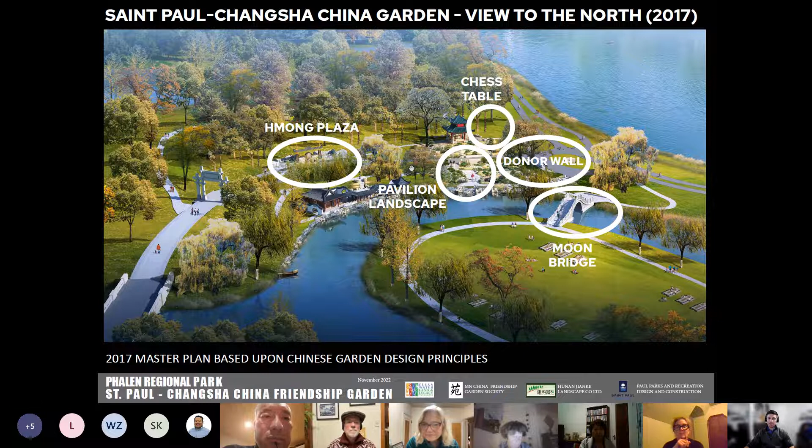And so if you remember, we have 2 different funding sources. One is an Arts and Cultural Heritage Fund. This is a legacy fund that has a deadline June 2023, so it's approaching fast. We also have another fund, which is state bonding, and this is directly used for construction only. And that end date is yet to be determined, but it is generally within 2 years from today's date.

And so our timeline, we started our last meeting in June and November, where we've been working with the community, going through designs, and it actually went back further into January of this year, at the kickoff of the site. So now we're moving into the construction document bidding phase once we go through this community engagement that's happening in November and December. Ultimately, we want to have construction documents completed so we can bid out the project and begin construction this spring when the legacy fund ends in June of 2023.

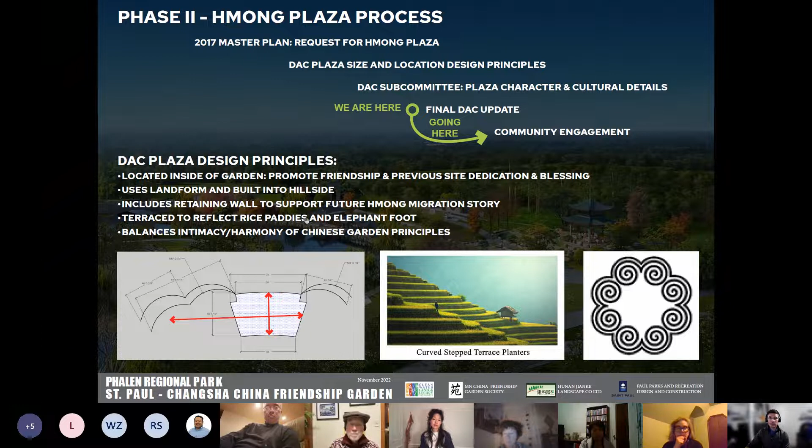The most important thing I want to point out is the features selected for this plaza. There's been a lot of thought and back and forth about what are the most significant Hmong features that will allow residents of all ages to walk on this plaza and understand that it is Hmong in itself. These features were discussed extensively, and the main elements chosen are two things: the instrument and the necklace.

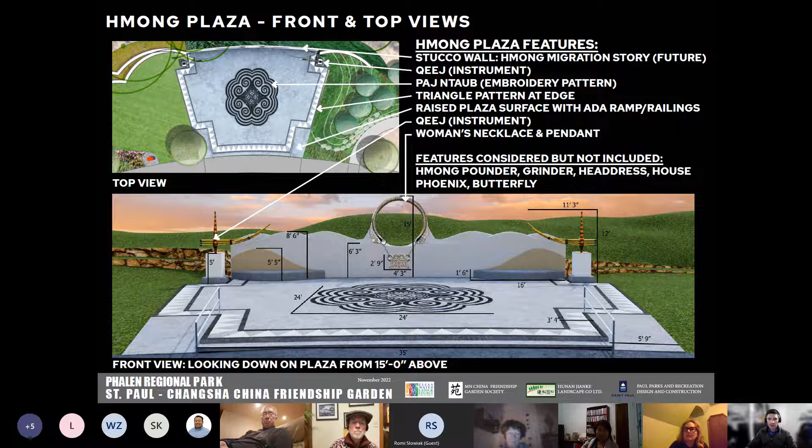The significant cultural items we're looking at are the instrument and necklace. The idea for these elements, which will be developed by the artist and artist fabricator, is that they would be made out of stainless steel. I'm showing everyone these designs, but we have an inspiration of what this necklace looks like—Donna was helpful to show us what a necklace and pendant looks like. This is the inspirational image for the necklace that you see on the wall.

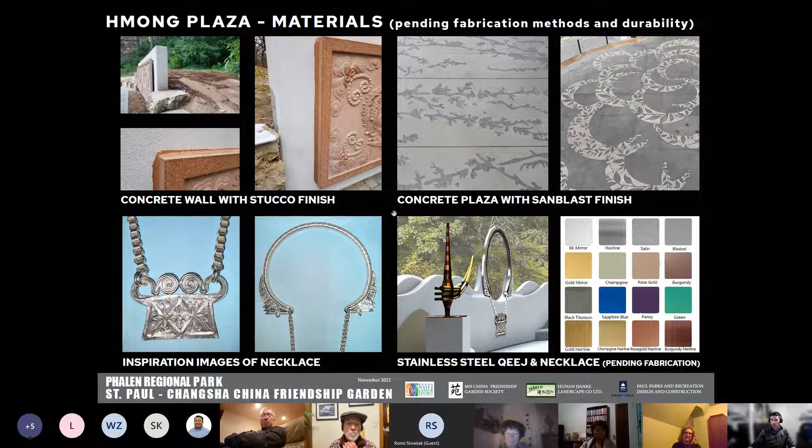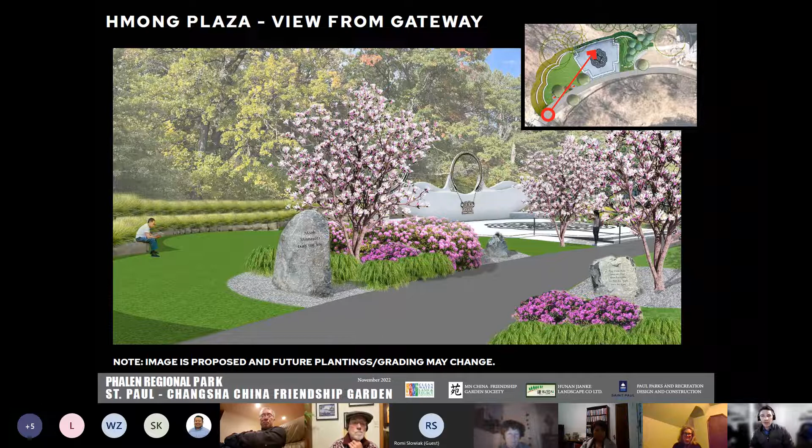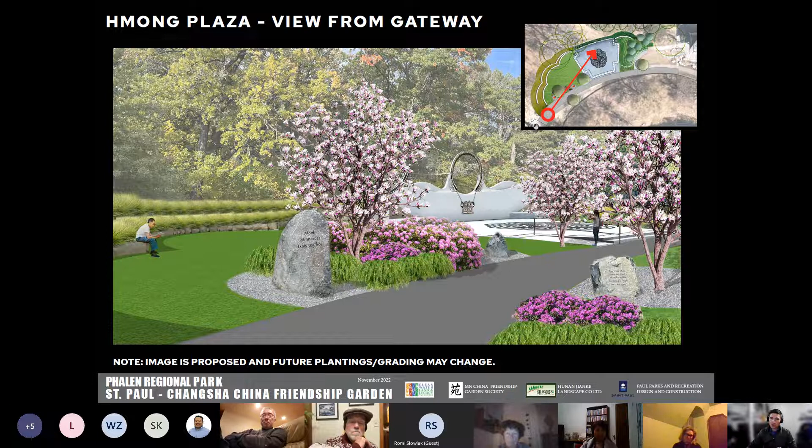All right, here are some fun images that help you understand the plan views we're looking at. I'll first show you this little inset—this is the point of the viewport of where we're looking, and this is the gateway. So the user has currently walked through the gateway and is standing to look at the Hmong Plaza. The pavilion's over here, and we are looking northeast towards the proposed Hmong Plaza.

Upon entry through the gateway, the user is going to be pointed at this set of plant material, but also framed by the 3 art stones placed in this location. I mentioned they are currently in a temporary spot, and the idea is that we will remove the stones to get construction equipment and activities through, then place them close to the same location and in the same order.

One other thing to point out is the terraced retaining walls. Here is an image of the terraced walls, which would be made out of the natural boulders that are on site, with grass planted on top to be reflective of rice paddies.

The lower wall itself would be a seat wall level, about 18 inches off the ground, similar to a bench or chair, allowing users a more informal seating area if there are no chairs or events happening, where anyone could sit along this wall. People could walk on it, but the idea is users would not walk up on top of the terraces or behind the wall. Ultimately, we would plant these with resilient materials such as junipers to suggest users not walk back there.

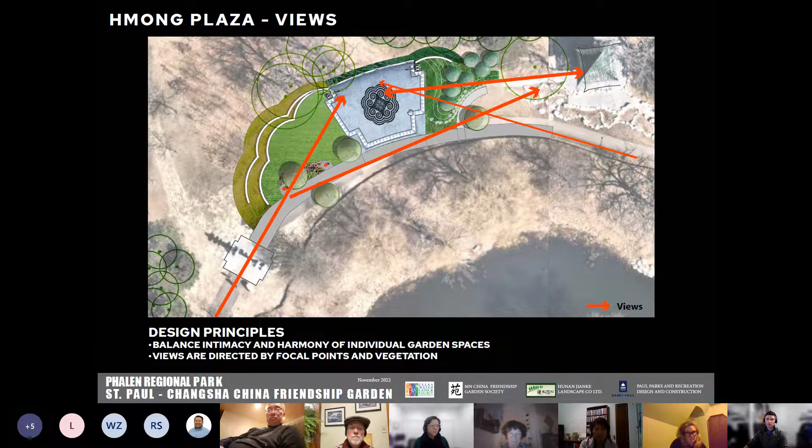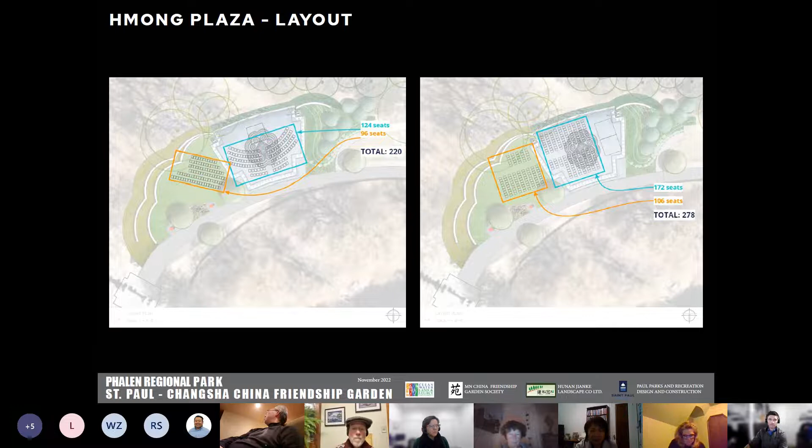Donna, you have a question? Yes, can you bring the qeej back? Do you want this image or do you want the other material? Okay, no, this one is fine.

Below the qeej there's two parts. One part says 5 feet, but there's another at the bottom. How high is that one? I think this whole thing is 5 feet. This would be probably around 1 foot in height. So the pedestal itself is 4, and then it sits on top of another base that is 1 foot in height. My question is, that last part, the small base, can that be a little bit larger so people can use it as seating?

Yeah, I don't see why that couldn't happen. I think we need to look at this seat wall proportionately with that, but we will be moving into more design development and construction documents, and we can look at the proportions and how that feels.

I think that would make sense if the pedestal does get raised, to prevent people from climbing up on top. But if it's a little bit bigger on the bottom, maybe even as it is now, is that a climbing encouragement? Yeah, it very well could be. So even if you're raising up the pedestal, then you're ultimately giving them a step and subtracting the height. Yeah, I guess that is another good point where we could take a look at maybe the seat wall's function as an area where people could sit, and we remove this larger base altogether.

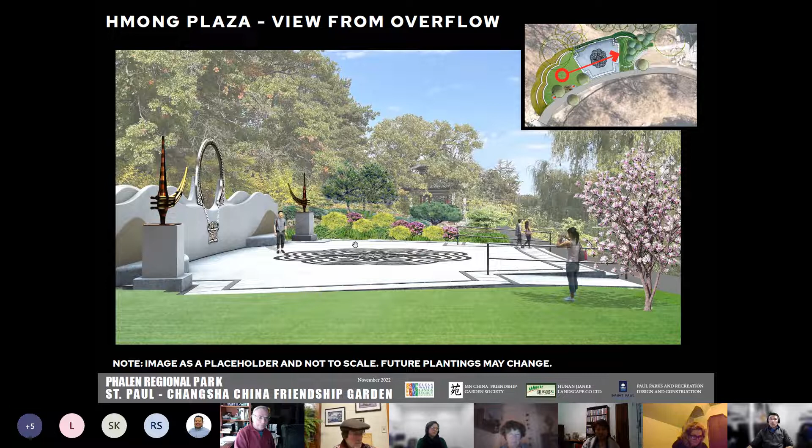If you remember, I was talking about the other phases of the project that we have funding for to advance them to design themselves. So it's not construction, but we may have other phases that are refined - the moon gate, the donor wall - that should be brought in front of the DAC. That is yet to be determined, but we do want to keep the DAC in the loop, and we will be providing email updates, and if there are major changes, have another DAC meeting.

This is Linda. I just wanted to piggyback on what Bill was saying. Once we know how much things are going to cost and what will be covered with the funds we have, we may have an opportunity to seek out funding for specific elements that aren't covered. And if we have a good solid price, that might be easier to find funding for certain elements.

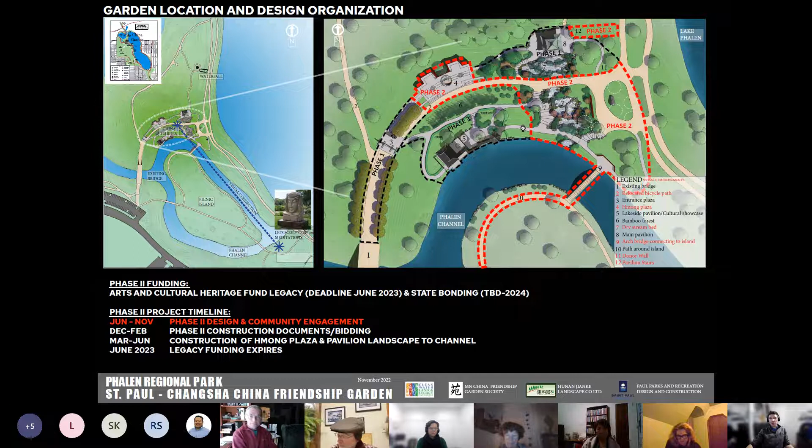Yes, Linda, I agree. Once we have bids completed, we will design and create construction documents for what we are seeing here. The benefit of that is we will have solid construction costs for each element that we can seek funding for, and have a good idea of what we're actually looking at for a price.

As long as you're on that slide, could you add a measurement bracket for the extension of the qeej instrument for the future? Yes, in between here, from the edge down to the ground. Got it. Yeah, for the 7 feet. Yes.

All right. One last call - are there any questions about the process, the plaza itself, or the next steps?

Nice job, Brett. Thank you, everyone. Really nice, this has been a great experience. I think everyone has collectively pulled together a great design that can be supported by the community.